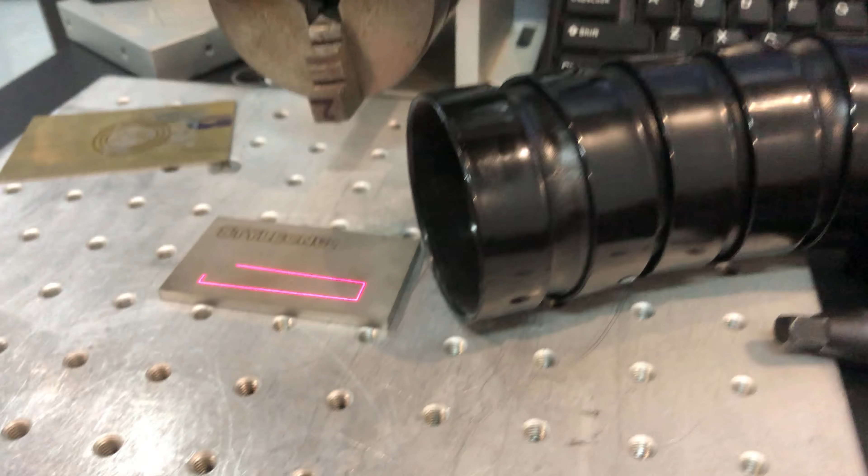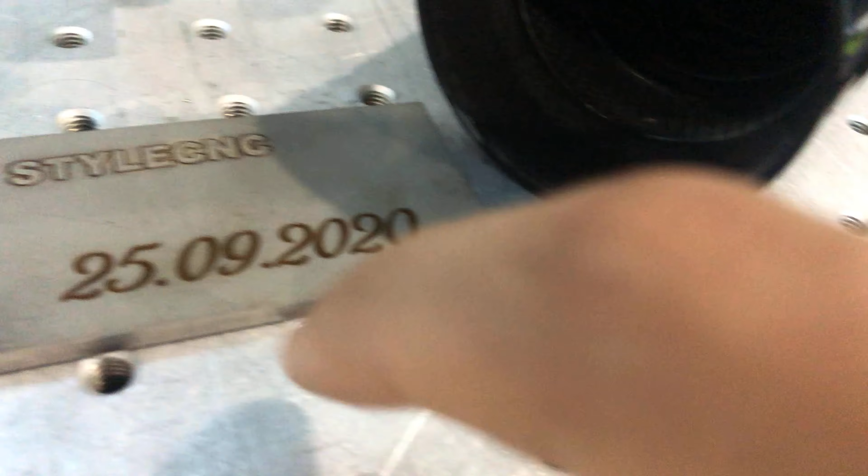After high power marking, there is a lot of black powder or dust at the marking position. This is the powder resulting from the melting of the material. If you use high power laser marking at this time, the powder will melt and stick to the marked location, so the marking surface is not smooth.

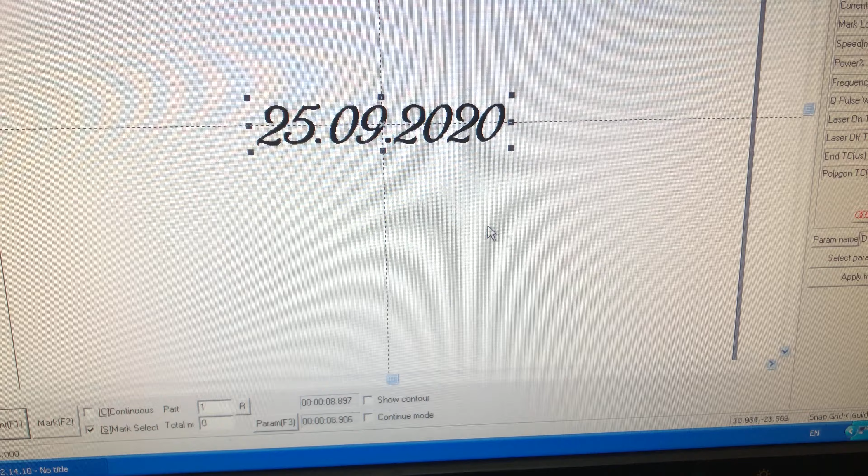The same graph needs to be copied. Reduce power, increase speed, and clean the surface of the powder.

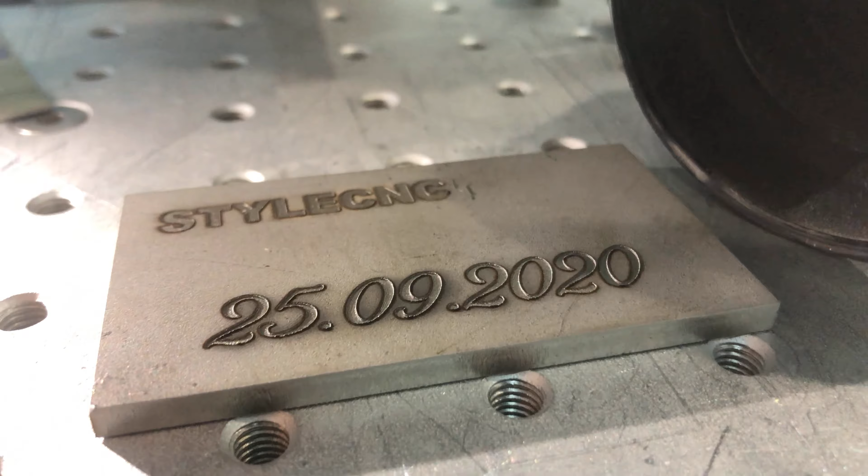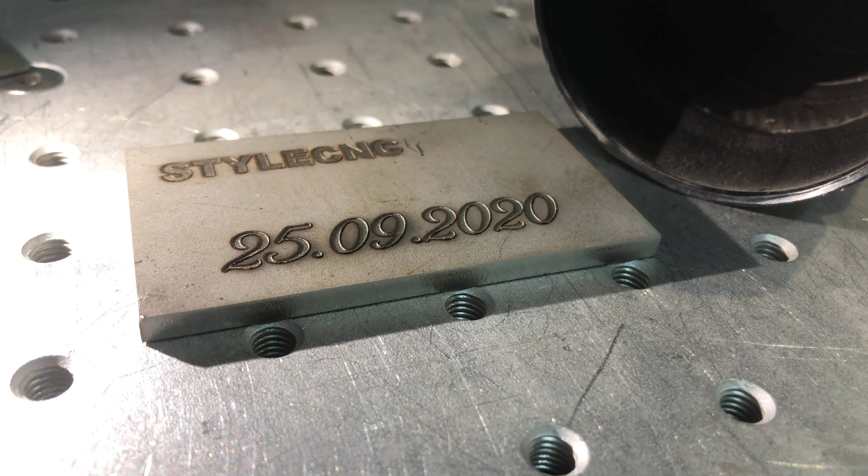After the engraving is finished, if the surface is too dusty, you can build a rectangle on top of the shape and clean surfaces with lower power.